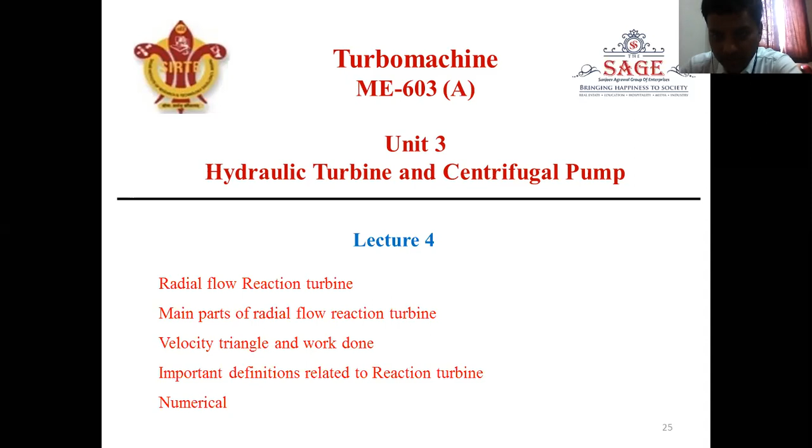Let's start with radial flow reaction turbine. Why is it called radial flow? Because water flows in radial direction, meaning during the flow of water, its distance from the center will either increase or decrease, and then it is called radial flow turbine.

This radial flow turbine can be divided into two categories. One is inward flow reaction turbine, if the water flows from outer to inner part. It is called outward flow radial turbine if water flows from inner to outer side, meaning discharge is at the outer side. If the discharge is at the center of the turbine, it is called inward radial flow turbine.

So there are two kinds of radial flow turbine: inward flow and outward flow turbine. Now why is it called reaction turbine? Because while entering the turbine, water has kinetic energy as well as pressure energy. In Pelton wheel, what we have seen is that the water contains only kinetic energy, but in reaction turbine, the water possesses kinetic energy as well as pressure energy.

This means that at inlet and outlet of the turbine, the pressures are different. At inlet, pressure is more, and at outlet, pressure is less. During the travel of water on the turbine blade, its pressure continuously decreases, and that pressure energy is converted into kinetic energy. So this is called reaction turbine, where the water possesses two kinds of energy at the inlet: kinetic energy and pressure energy.

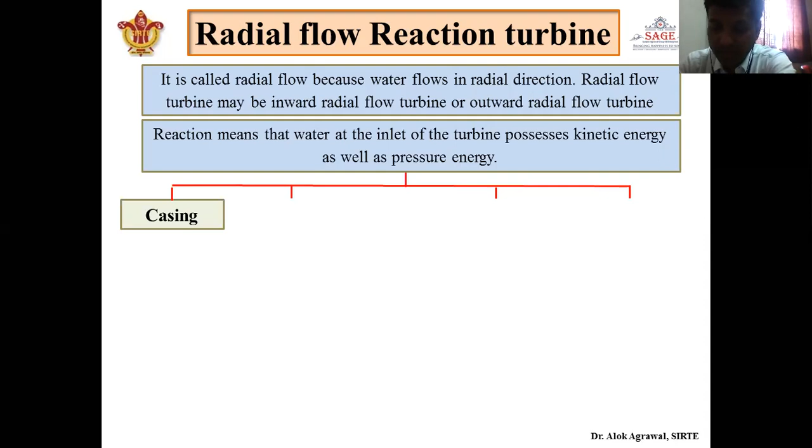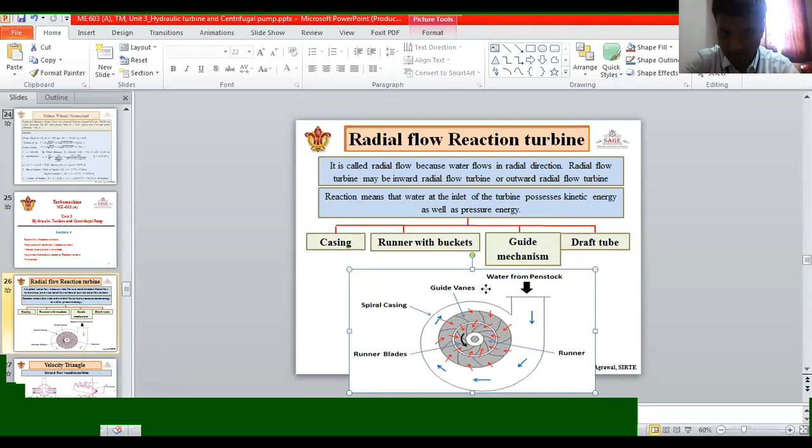So what are the main components? Casing, runner with bucket, guide vanes, and draft tube. This is not runner, this is guide mechanism.

So what we have seen: there will be a casing, water will travel like this, and during this travel, it will get inside the guide mechanism. This outer circle is called guide mechanism. After proper guidance, water gets inside the runner, which is mounted with bucket, and after performing its work, transforming its kinetic energy and pressure energy, the water exits through the draft tube.

Now why is draft tube required? Because when water gets inside the runner, its pressure is high, and while traveling through the runner continuously, the pressure energy is converted into kinetic energy. At the outlet condition, there are mostly chances that the pressure energy reduces below atmospheric pressure.

So there will be difficulty in discharge. To avoid this, there is a draft tube which again converts that low pressure energy into high pressure energy by reducing the kinetic energy in the draft tube. What happens?

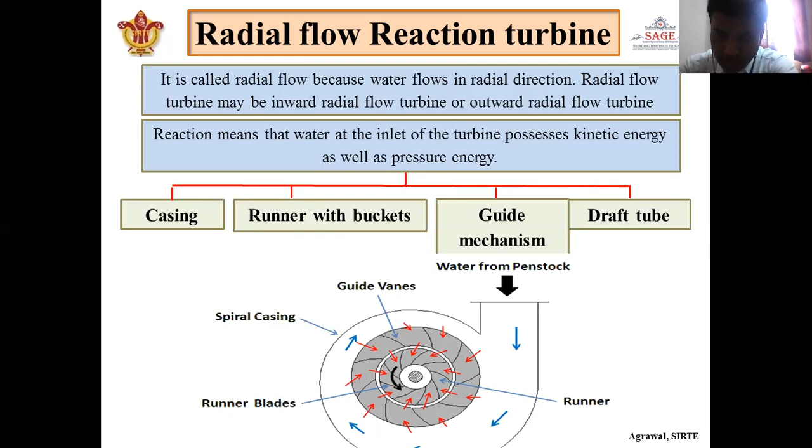Kinetic energy is again converted into pressure energy so that the outlet water will get proper discharge. Okay, so this is the working and important component of radial flow reaction turbine.

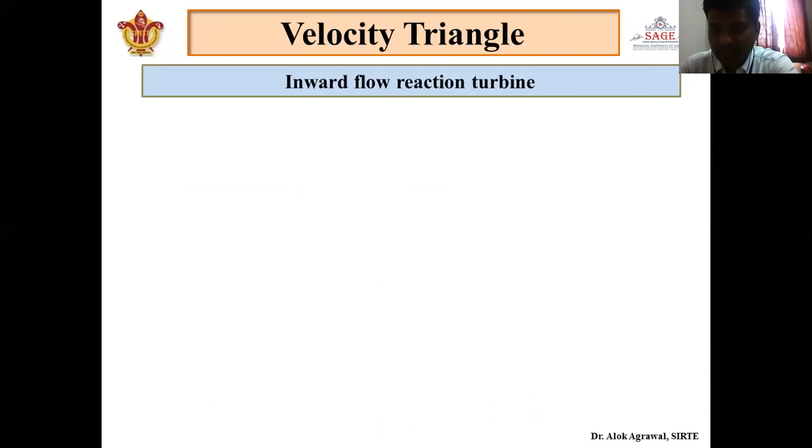Guide mechanism is mainly used to guide the water, and also there will be a conversion of energy in this guide mechanism. Next is velocity triangle. Velocity triangle is very much similar to the rest of the turbine, but there is a slight difference between the inward flow reaction turbine and outward flow reaction turbine. There is very little difference.

So while entering through the runner, the diameter is D1, and while exiting from the runner, the diameter is D2. So inlet diameter is more than outlet diameter in case of inward flow reaction turbine. Blade velocity depends upon the diameter. In case of Pelton wheel, the diameter at inlet and outlet remains the same, so there is the same blade velocity, U is equal to U1 is equal to U2. But here the diameter is changing: inlet diameter is D1, outlet diameter is D2, so there will be two different blade velocities, at inlet and at outlet.

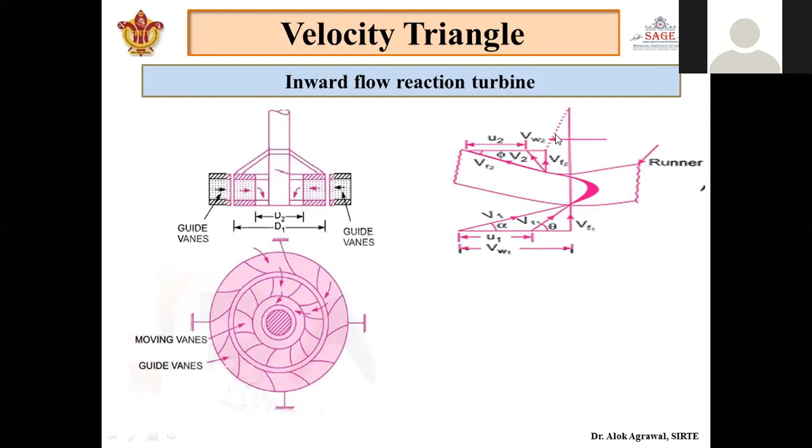Depending upon the values of VW1 and VW2, we will get the work performed by the force developed. Maybe this figure is not very clear, so I'm drawing it separately - this is the inlet velocity triangle and this is the outlet velocity triangle.

A similar triangle is obtained for the outward flow reaction turbine as well, but the difference is - what? Water will come from inside and travel in the reverse direction. The water comes at the center portion and travels to the guide vanes, and then to the moving vanes. This means the guide vane will be at the inner diameter and the moving vanes or blades will be at the outer diameter. The inlet diameter is D1 and outlet diameter is D2. Inlet diameter is always less than outlet diameter in case of outward flow reaction turbine. The rest of the velocity triangle will be the same.

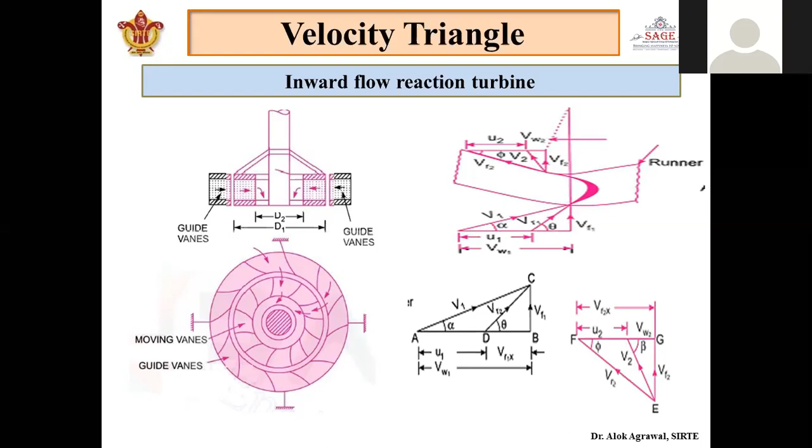Let's see the outward flow reaction turbine, so the case will be like this. Inside there will be a guide wheel. In case of inward flow, the guide wheel will be at the outside, along with the runner.

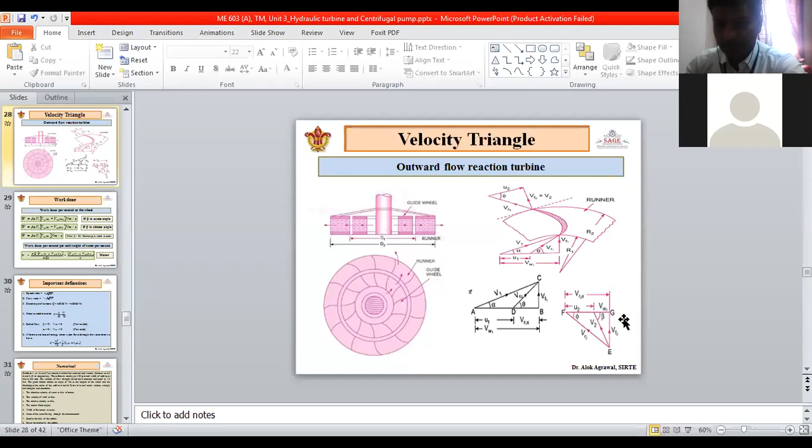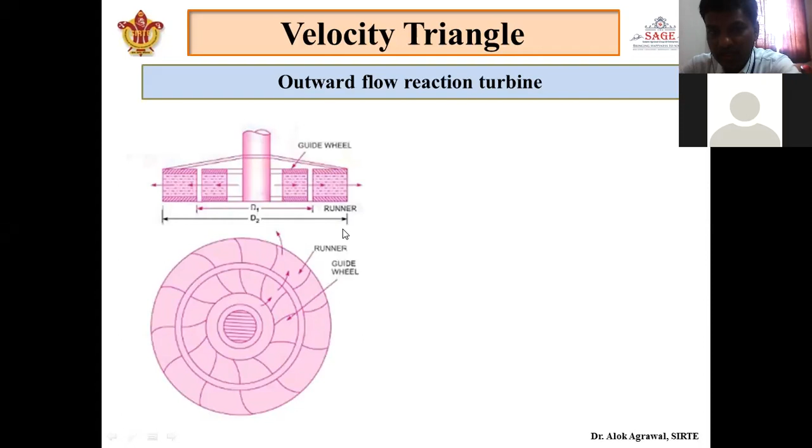So we are seeing the outward flow reaction turbine. Here the water gets inside, entering from the center portion, and moves through guide vanes fixed in the inner portion, and then moves to the runner which is at the outer portion. So there is a reversal in direction - here the inlet diameter is smaller, D1, and outlet diameter is D2. So in this case, the blade velocity at inlet will be less and blade velocity at outlet will be more.

So there is a slight change in the velocity diagram. The inlet will be entering at radius r1, which is a smaller radius, and at the outlet there will be a greater radius r2, meaning the diameter is more. So this is the case of an outward flow reaction turbine.

But if you make the velocity triangle separately, there will not be any difference. The inlet velocity triangle will look like this, and the outlet velocity triangle will look like this. The only difference is in the value of u1 and u2. In case of inward flow reaction turbine, u1 is greater than u2, and in case of outward flow reaction turbine, u2 is greater than u1.

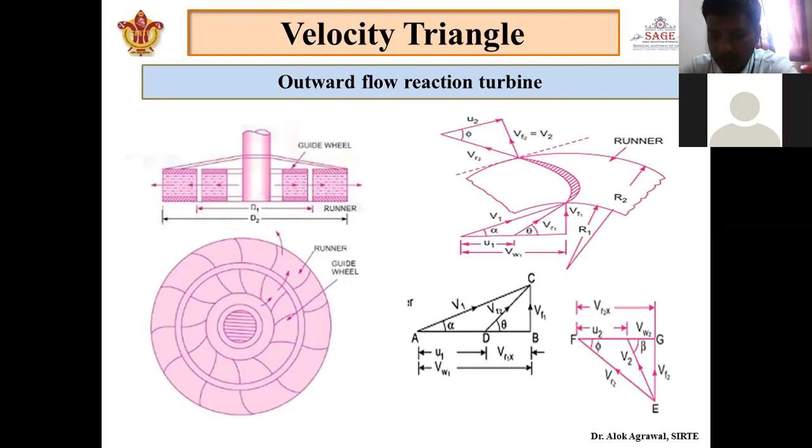This condition is clear because of the diameter, since u is equal to pi d n by 60, which we all know.

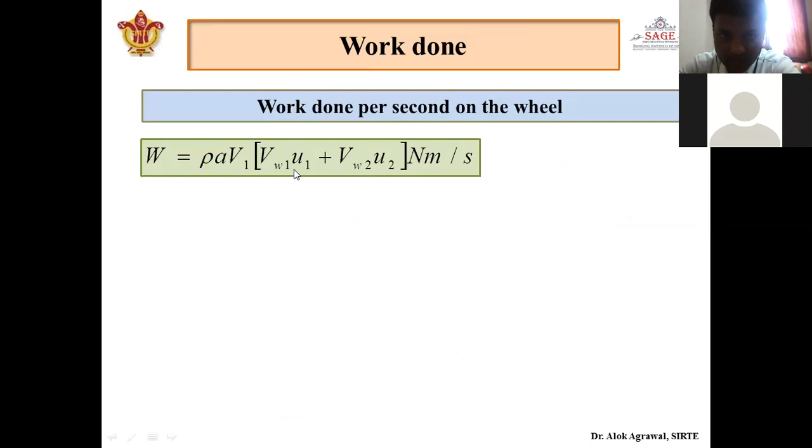Next, work done. There will not be any special formula, this is what we discussed earlier. The same work done formula applies here also, that is, work done equals rho A V1 times (VW1 U1 plus VW2 U2). In case of Pelton wheel, u1 and u2 were same, so that term was outside the bracket. But here we have seen that inlet and outlet diameters are different, so U1 and U2 will be different, so we have to keep this with VW1 and VW2 separately. So work done will be rho A V1 (VW1 U1 plus VW2 U2).

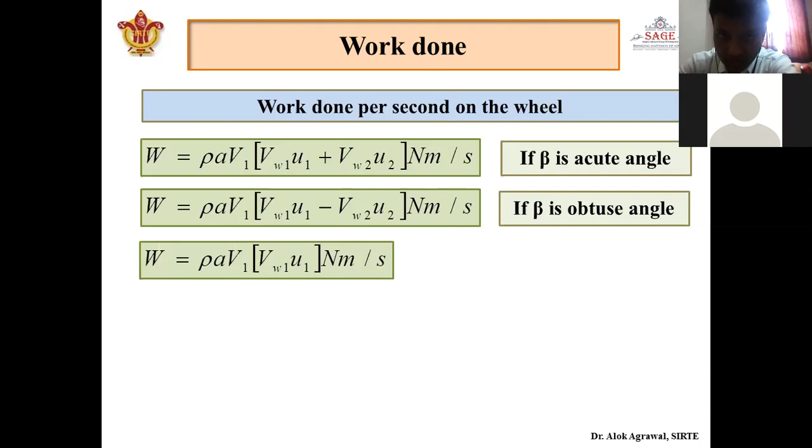Again, this work done depends upon the value of outlet angle beta, as we already saw in case of Pelton wheel. If beta is an acute angle, this formula is valid. But once beta is an obtuse angle, VW2 becomes negative, as we have already seen, and there will be a negative sign. If beta is 90 degrees, there will be no VW2 U2 term because VW2 becomes 0, and the work done is rho A V1 VW1 U1. If beta is equal to 90 degrees, we call this condition as discharge is radial, and in this condition VW2 is 0, as we already saw in case of Pelton wheel.

Same formulas apply here also. The only difference is there will be a difference in U1 and U2. In case of Pelton wheel, blade velocity was same at inlet and outlet, but here the blade velocity will be different because the diameter is changing during the inlet and outlet condition.

Now in Pelton wheel also we saw one important formula, that all this work is work done per second. But if we want to calculate work done per second per unit weight of water per second, we have to divide this by the weight of water striking the blade per second. So what will be the weight of water? Rho A V1 is the mass, multiplied by G gives the weight of water, so rho into Q into G.

This A into V1 can be replaced by Q as per the continuity equation. So if we multiply rho into Q into G, we get the weight of water striking. Rho Q gets cancelled out, and we get the formula VW1 U1 plus VW2 U2 by G. This gives work done per second per unit weight of water per second.

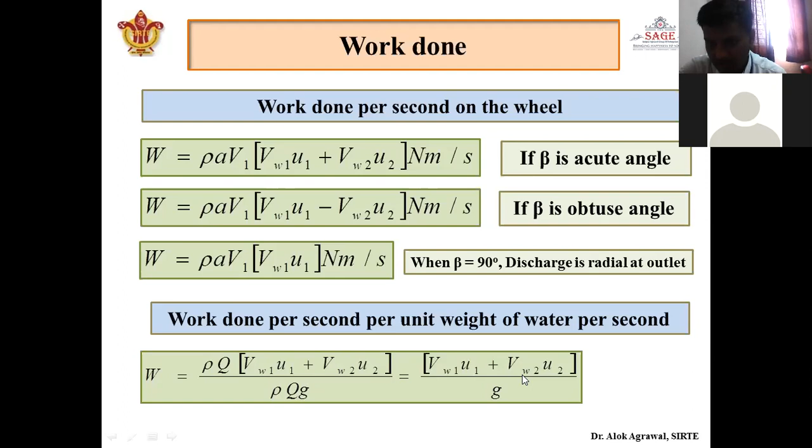Now, can anyone say what will be the unit here? You can unmute yourself and say what will be the unit of VW1 U1 plus VW2 U2 by G. A student responds: sir, it will be meter. Very good, Nikhil. So the unit will be meter.

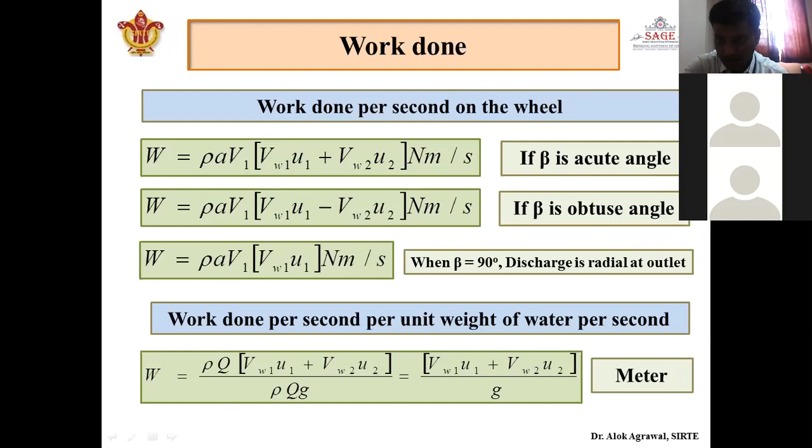So now moving forward, there are certain important definitions for radial flow reaction turbine, that is speed ratio. Speed ratio is U1 by under root 2GH. Again, we have flow ratio, which is VF1 by under root 2GH. All these terms will come in numerical problems.

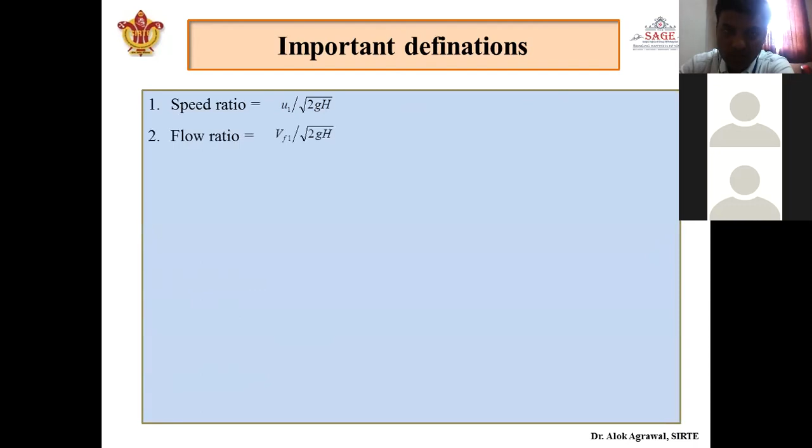That's why I'm saying, discharge Q is equal to, in case of Pelton wheel, what was the discharge formula? Area into velocity, that is the formula, it is a multiplication of area into velocity. In case of Pelton wheel, the water is coming from the jet, so we take area as pi by 4 d square, where d is the diameter of the jet, into v1 velocity. But here, what is happening? The water is getting inlet from the circumferential area, from all over the circumference.

So the area will be pi into d1 into b1, that circumferential area into velocity of flow. This will give Q. It is pi d1 b1 vf1, and that will be equal to pi d2 b2 vf2, because we are considering that there is no loss of water when water flows from inlet to outlet condition. So Q will be pi d1 b1 vf1 is equal to pi d2 b2 vf2. This is a very important formula, and it will be used in almost every numerical.

Next is head available at inlet. In case of Pelton wheel, the head available is only because of kinetic energy. In that case, h is equal to v1 square by 2g, and that is how we calculate the velocity v1, that is under root 2gh in case of Pelton wheel.

But here it is a reaction turbine with kinetic energy, pressure energy will also be there. So the total head available is a sum of pressure energy and kinetic energy: pressure at inlet P1 by rho g plus V1 square by 2g. This is the head available. This is again very important to keep in mind. Here we cannot calculate velocity V1 by the under root 2gh formula that we use in case of Pelton wheel, because here pressure energy is also there in addition to kinetic energy. So this is a very important formula.

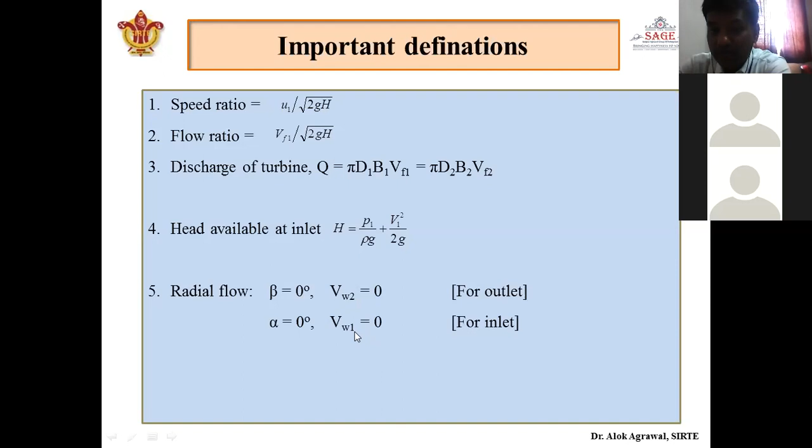Now, if there is radial flow at outlet, beta will be equal to 0 and VW2 will equal 0. And if there is radial flow at inlet, sometimes in a numerical it is given that there is radial flow, consider radial flow at inlet and outlet both. In that case alpha will become 0 and VW1 will be 0. So this is a special case.

And if you consider that there is no loss of energy during the flow of water through the vanes, then total head available H is equal to P1 by rho g plus V1 square by 2g, minus V2 square by 2g. This is the velocity with which water goes out at outlet, we are considering that absolute velocity at outlet as v2.

So if we reduce this head by the head available at outlet, this term will give the change in head, total head at inlet minus head available at outlet, and if there is no loss, then total head will be converted into work. So in case of no loss of energy, by the energy balance equation, we have total head at inlet minus total head at outlet equal to the work we derived: 1 by g times vw1 u1 plus or minus vw2 u2. This plus minus depends upon the value of beta. So this is again a very important formula.

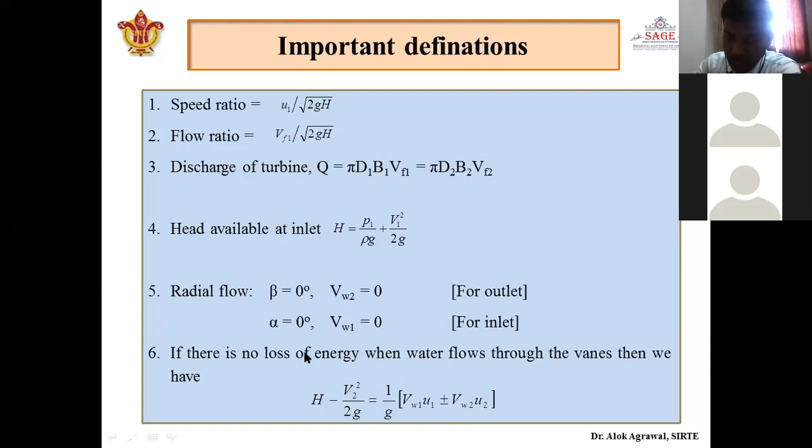So this slide is very important, speed ratio for all these terms will come in numericals when we solve them. Next let's start with numericals, we'll solve only 2 numericals here. It looks big, but it is a very easy numerical.

Let's start it. An inward flow reaction turbine has external and internal diameter as 0.9 and 0.45 respectively. In the first line itself it is given that it is an inward flow reaction turbine, meaning water will flow from outside and discharge at the center of the turbine. So external diameter is 0.9 and internal diameter is 0.45, meaning D1 will be 0.9 and D2 will be 0.45, because in an inward flow reaction turbine, inlet diameter is more and outlet diameter is less. So in this first line we have to decide that diameter D1 is 0.9 and diameter D2 is 0.45.

The turbine is running at 200 rpm. This will help us evaluate the value of blade velocity, because u1 will be pi d1 n by 60 and u2 will be pi d2 n by 60. And the width of the turbine at inlet is 200 mm, width at the inlet means b1, b1 is given as 200 mm. The velocity of flow through the runner is constant and equal to 1.8 meter per second, so VF1 is equal to 1.8 meter per second, velocity of flow through the runner is constant.

Yes, it is saying that constant. That means VF1 is equal to VF2, and it is 1.8 meter per second. The guide blade angle is 10 degree. It means alpha is 10 degree to the tangent of the wheel, and discharge at the outlet of the turbine is radial. Listen, this is very important line. Discharge of the turbine is radial at outlet. What does it mean? It means beta is equal to 0 degree, and if beta is equal to 0 degree, VW2 will be equal to zero. So with all these parameters, we can easily draw our velocity triangle.

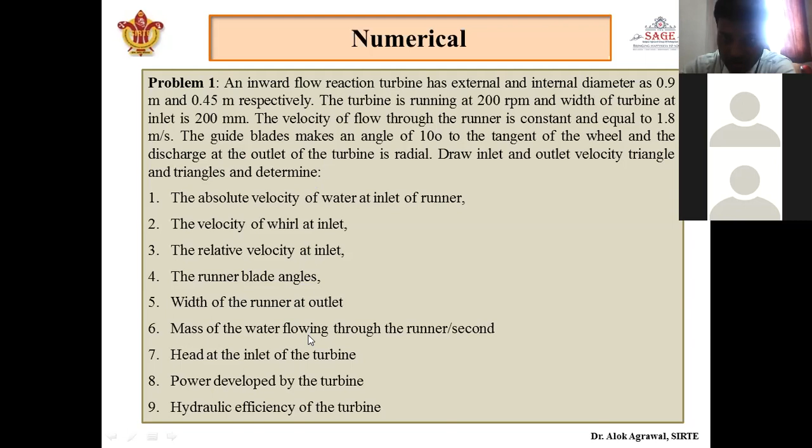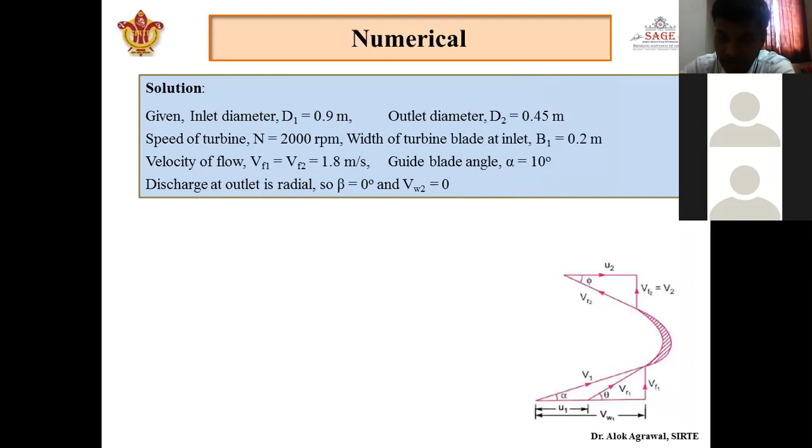Draw inlet and outlet velocity triangle and determine the following terms. Let's move to the solution. I'm not writing here the complete given conditions, but still, inlet diameter D1 is equal to 0.9, outlet diameter D2 is equal to 0.45, N is 2000 RPM, B1 is 0.2, velocity of flow will remain constant, guide blade angle alpha is equal to 10 degrees. Discharge at outlet is radial, so beta is equal to 0 degree and VW2 is equal to 0.

From this data, we can calculate the tangential velocity at inlet, U1 is equal to pi D1 N by 60. D1 is 0.9, N is 200, so it will be 9.424 meter per second.

Tangential velocity at outlet, U2, it is U2 not U1. So U2 is equal to pi D2 N by 60, and it will be half of that of inlet. This will be our velocity triangle. Since discharge is radial, beta is equal to 0 degree and VW2 vanishes from this triangle. So this is the simple velocity triangle according to which we have to make all the calculations. First, what is the absolute velocity of runner at inlet of the turbine?

From the inlet velocity triangle, we can say sine alpha is equal to perpendicular upon hypotenuse. We cannot apply the formula V1 equal to under root 2GH that I already told, because it is not a Pelton wheel. That formula is applicable only for impulse turbines, not reaction turbines. In a reaction turbine, the energy head available is because of kinetic energy as well as pressure energy.

So V1 sine alpha is equal to VF1. Sine alpha is perpendicular upon hypotenuse, so we get VF1, V1 sine alpha is equal to VF1. From this formula, VF1 is given in the question as 1.8, alpha is 10 degree, so we can calculate V1 as 10.365 meter per second. So the first point is absolute velocity of water at inlet.

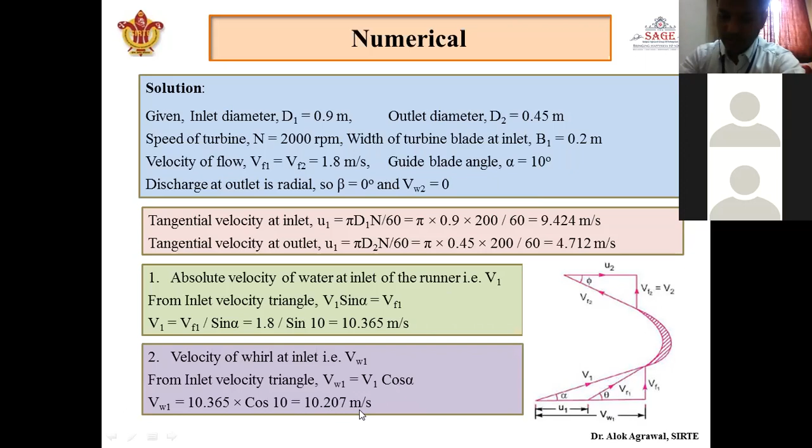Next, relative velocity. Relative velocity VR1 - look at this small triangle, it is a right angle triangle. Hypotenuse square is equal to perpendicular square plus base square. Hypotenuse is VR1, perpendicular is VF1, and base is VW1 minus U1. Everything is known apart from VR1. Applying this, VR1 is equal to under root of VF1 square plus VW1 minus U1 whole square. Substituting all the values, we get relative velocity as 1.963 meter per second. So 3 points are over.

Next is runner blade angle. Runner blade angle, whenever it is asking for theta and phi, very simply, tan theta or cos theta, anything we can apply here. Suppose sin theta is equal to perpendicular upon hypotenuse. We know VF1, we know VR1, theta can be evaluated. If I am talking about tan theta, it is VF1 upon base, so base will be VW1 minus U1. Let us take tan theta. Tan theta is equal to VF1 upon VW1 minus U1. All the things are known on the right hand side. Substituting this, we get tan theta is equal to 2.298, and with this theta is equal to 66.48.

Similar is the case with phi. What is phi? Tan phi is equal to VF2 by U2.

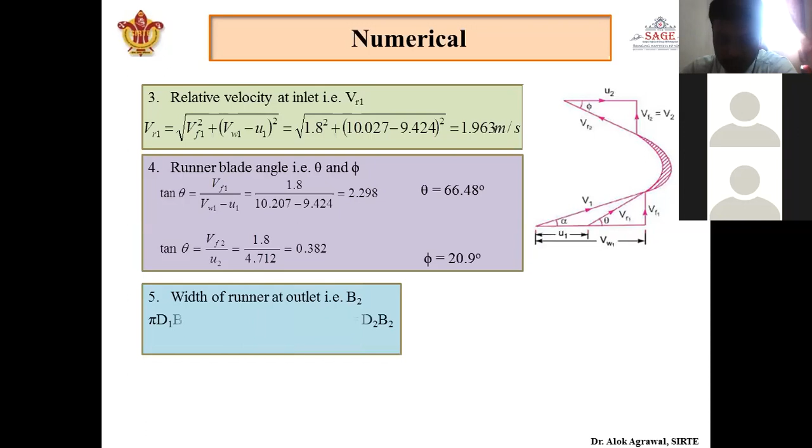Next is width of runner at outlet. It can be calculated by the flow rate formula Q is equal to pi d1 b1 vf1, which is equal to pi d2 b2 vf2. Here pi will be cancelled out, and Vf1 is equal to Vf2 as given, so that cancels too. So we get d1 b1 is equal to d2 b2. We know d1, d2, and b1, so b2 can easily be calculated. We get b2 as 0.4 meter.

Next, mass of water flowing per second. Once we get Q, Q's unit is meter cube per second, and mass flow rate is kg per second. Once we get Q, we multiply it with the density of the fluid to get kg per second. So mass flow rate per second is equal to rho into Q. Rho, the density of water, is 1000, and Q is pi d1 b1 vf1. d1 we know, b1 we know, vf1 is 1.8 as given. Substituting this, we get mass flow rate as 1017.8 kg per second.

Seventh is head at inlet of the turbine. This is very important. We have just seen this formula H minus V2 square by 2G, where H is total head available at inlet, and this is head available at outlet. As it is radial flow discharge, the VW2 U2 term will go. So the remaining term will be 1 by G VW1 U1.

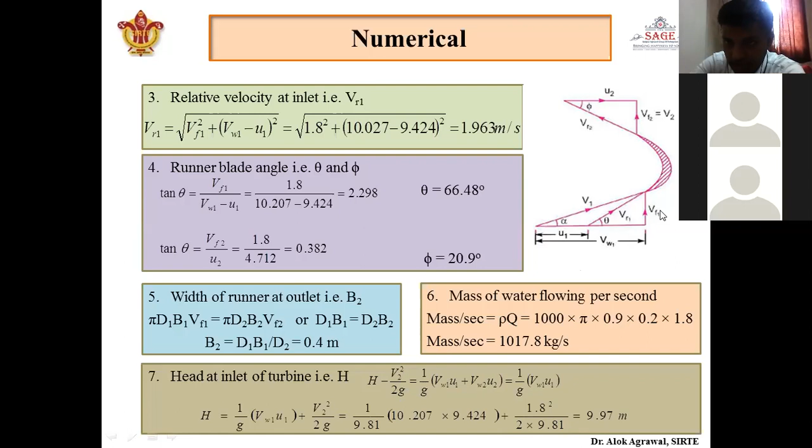So we know V2, because V2 is equal to VF2, so we know V2 as 1.8. VW1 and U1 we have already calculated. Substituting all this, we get total head available as 9.97. This is again very simple - we just have to remember the formula and be clear about the velocity triangle.

Everything will be clear. Next, power developed. Power developed has a simple formula: rho Q into VW1 U1 by 1000. As discharge is radial, there will be no VW2 term. Substituting the formula, we get 97.9 kilowatt power.

Next, hydraulic efficiency. Hydraulic efficiency will be VW1 U1 by GH, which is equal to 10.207 into 9.424 by GH. Hydraulic efficiency formula relates head available and work done. So it will come to 98.34. All are formula-based problems.

Just we have to remember the formula and be clear about the velocity triangle. So there is one more numerical, but yes Nikhil, you want to ask something?

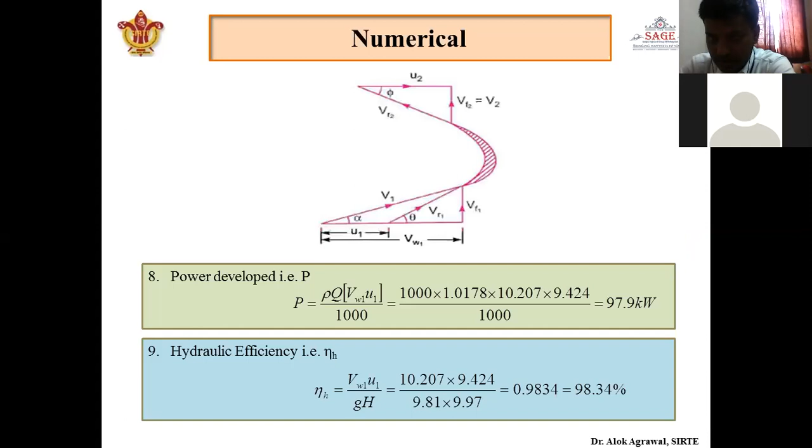Okay, let's see one more numerical. An inward flow reaction turbine has external and internal diameter as 1 meter and 0.6 meter respectively. The hydraulic efficiency is given as 90%. Head at the inlet is given as 36 meter. The velocity of flow at outlet is 2.5 meter per second and discharge is radial at outlet.

Again, VW2 is equal to 0. If the vane angle at outlet is 15 degrees, meaning phi is given as 15 degrees, width of wheel is 100 mm at inlet and outlet, meaning width will remain constant at b1 equal to b2 equal to 100 mm. So we have to determine this thing.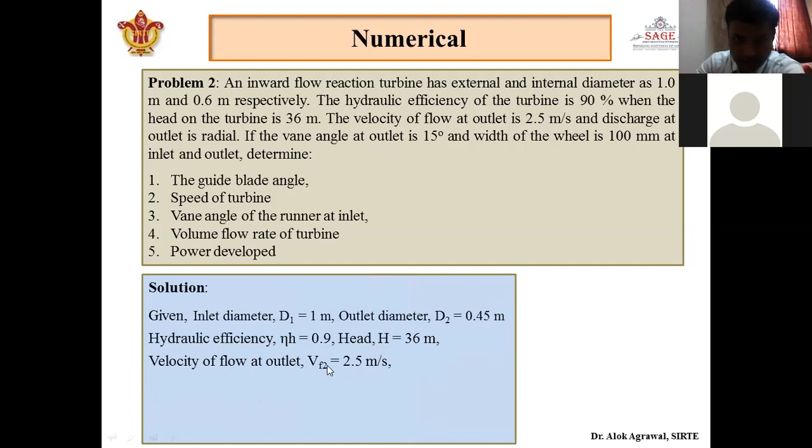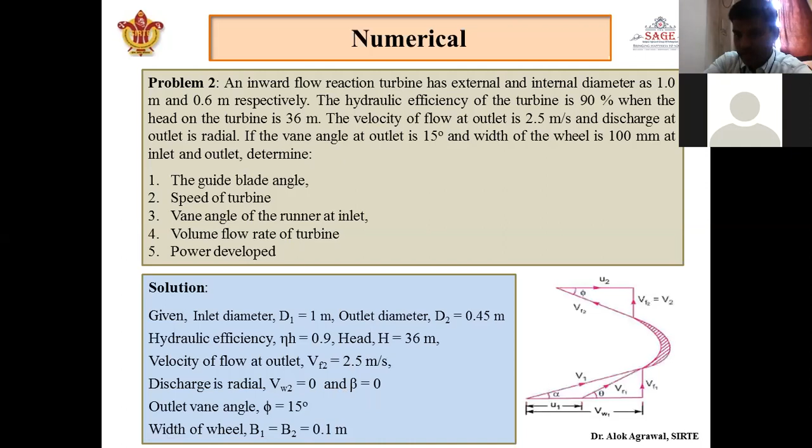It is not given here that velocity of flow at inlet and outlet are same, so Vf1 will be different from Vf2. VW2 is 0, beta is 0 as discharge is radial. Outlet angle phi is 15 degrees. Width is given, and the velocity triangle will remain same as discharge is radial. Okay, let's move to solve this problem.

Hydraulic efficiency is given as VW1 U1 by GH. Hydraulic efficiency 0.9 is given, G is 9.81, and head is 36. So from here we get VW1 U1 is equal to 317.85. Because we don't know anything about the inlet velocity triangle, we have to calculate every velocity related to that.

So we have to start from here in this case, because no theta, no alpha, no V1, U1 is given, nothing is given, and RPM is also not given, so we cannot calculate U1.

Next, from the outlet velocity triangle, tan phi is equal to Vf2 by U2. Vf2 is given as 2.5, U2 is not given, tan phi is given as 15 degrees.

So from here we can get U2 as 9.33 meter per second. Now this U2 is also pi d2 n by 60. Pi d2 is given, diameter at outlet is given, n is unknown. So from U2 equals pi d2 n by 60, we can calculate n. The value of n comes out to be 296.98 rpm.

With the help of this n, we can get the blade velocity at inlet, because u1 is equal to pi d1 n by 60. d1 is given, and we have just calculated n, so u1 is 15.55 meter per second. So in this case, we are doing reverse calculation, not from inlet to outlet velocity triangle, but from outlet to inlet velocity triangle, because sufficient data is not given about the inlet velocity triangle. So from here we get the first thing, u1.

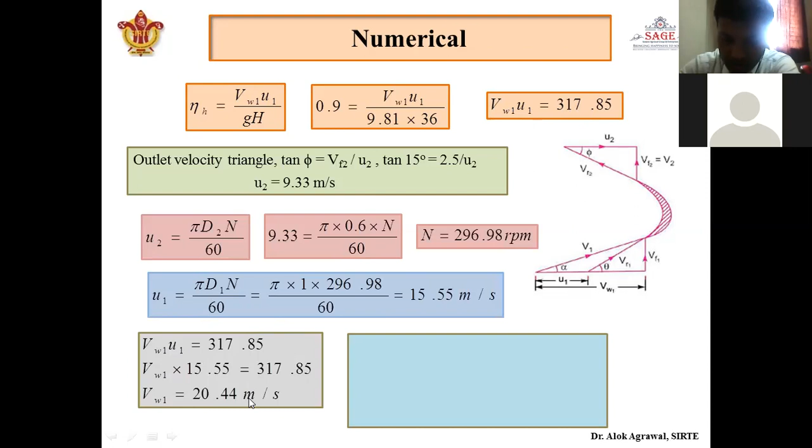Now see, VW1 U1, we already have one equation, that is 317.85. U1 we have calculated. From this we will get VW1 easily as 20.44 meter per second. Once we get VW1, everything will be clear.

We know pi d1 Vf1 is equal to pi d2 Vf2. Pi will be cancelled out. It is given b1 is equal to b2, so that will be cancelled out too. What remains is d1 Vf1 and d2 Vf2. So from here Vf1 is equal to d2 by d1 into Vf2. d2 is known, d1 is known, Vf2 is given as 2.5. So from here we get Vf1 equal to 1.5 meter per second.

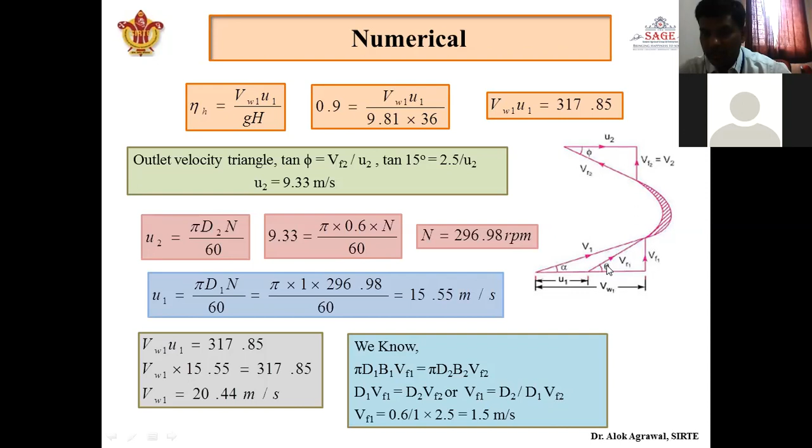Once we get Vf1 and Vw1, we can calculate alpha and theta, and everything will be known about the inlet velocity triangle. So let's start solving the problem now.

Guide blade angle alpha: tan alpha is equal to perpendicular upon base, that is Vf1 by Vw1. Vf1 is 1.5 as we calculated, Vw1 is 20.44. So alpha is 66.48 degrees.

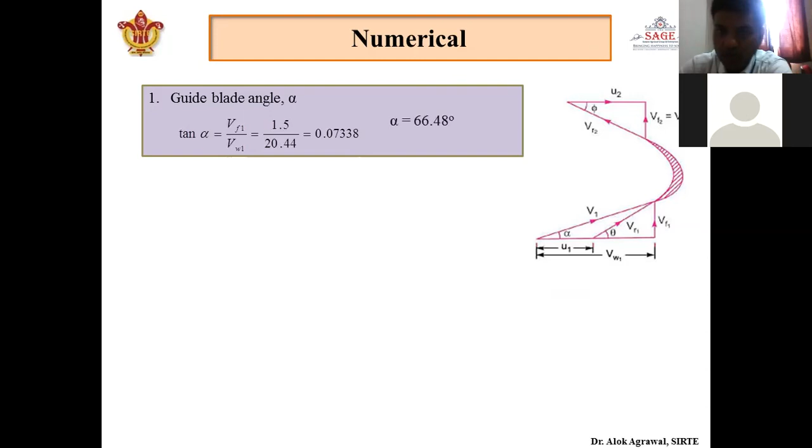Second, the RPM we have already calculated is 296.98. Third, runner blade angle theta: tan theta is again perpendicular upon base, perpendicular is Vf1, base is Vw1 minus u1, as we saw in the last problem. Substituting all the values, since we now have all the values of the inlet velocity triangle, we get theta equal to 17.05 degrees.

Next is volume flow rate of water, Q is equal to pi d1 b1 Vf1. We just have to remember the formula.

Next is power developed, the last point. Power developed is again U1 VW1 upon GH into rho Q. Power developed is rho Q into VW1 U1 by 1000, that is the formula from hydraulic efficiency. Q we have just calculated, VW1 and U1 we know. So substituting all the values, we get 149.76 kilowatts.

So see, in hydraulic turbine numericals are very easy. We just have to remember the formula and be clear about the velocity triangle. Every time something is hidden in the problem, so we have to catch that hidden part from the problem, that is discharge is radial at outlet. So we have to know that beta is 0 and VW2 is 0. There are certain things which will be given.

So with this, the numerical related to radial flow reaction turbine is completed. Today's class is over for now, but in the next class we will see two very important turbines, that is Francis turbine and Kaplan turbine. Both turbines are very important, and there are very high chances that the numerical problem will come either from Francis turbine or from Kaplan turbine in your exam.